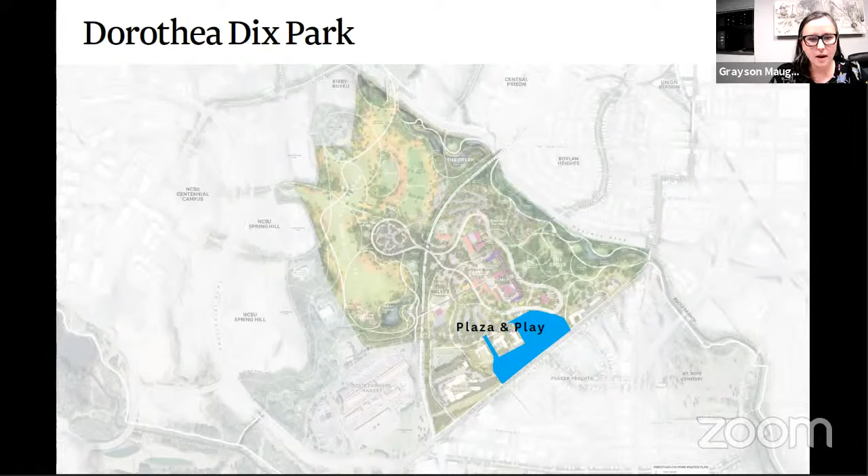You can also see on this image where the Plaza and Play lies within Dix Park and along Lake Wheeler Road, and how close it will be to the neighboring Fuller Heights neighborhood, providing future connections into downtown, to the farmers market, and to I-40.

This is a somewhat busy area of town. We have the Western Boulevard BRT project that the planning department is working on. We are working on connections to John Chavis Memorial Park with the Dix to Chavis project. The areas in pink within the park are phase 1 projects. Healing Transitions in green, which is right next to Plaza and Play, is also planning for some site expansion. And the State Farmers Market has recently adopted a master plan in the last few years.

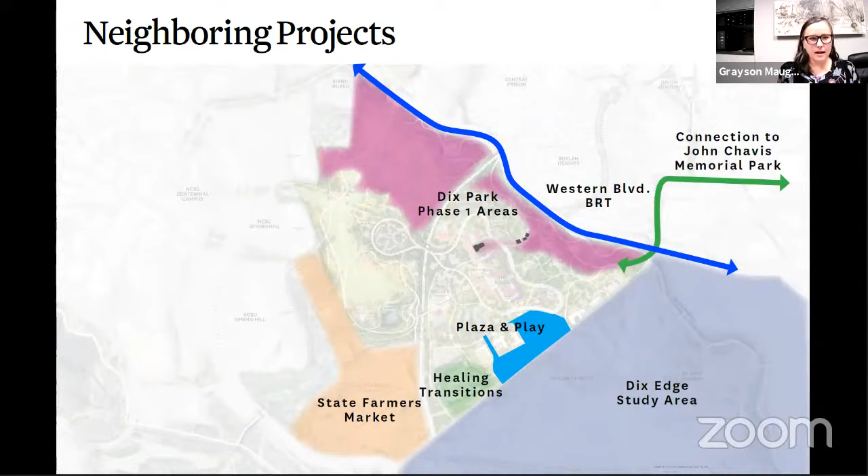And then in purple, I will mention the Dix Edge study area. This project is being run by the City of Raleigh's planning department. You can see how the project area is adjacent to Dix Park, but in particular the Plaza and Play area. During the development of the master plan for Dorothea Dix Park, City Council realized that the park project was going to have some impacts on the neighboring area, and allocated money to conduct the study area project. It is currently underway.

If you are interested in following this project, which will be creating a small area plan and looking at things like streetscape for the area, please go to the project webpage, which is raleighnc.gov/dix-edge. They are in what they are calling their visioning sessions, which are a series of meetings coming up in February. We heard your concerns. Now let's find some solutions. So I encourage you to participate in those meetings as well.

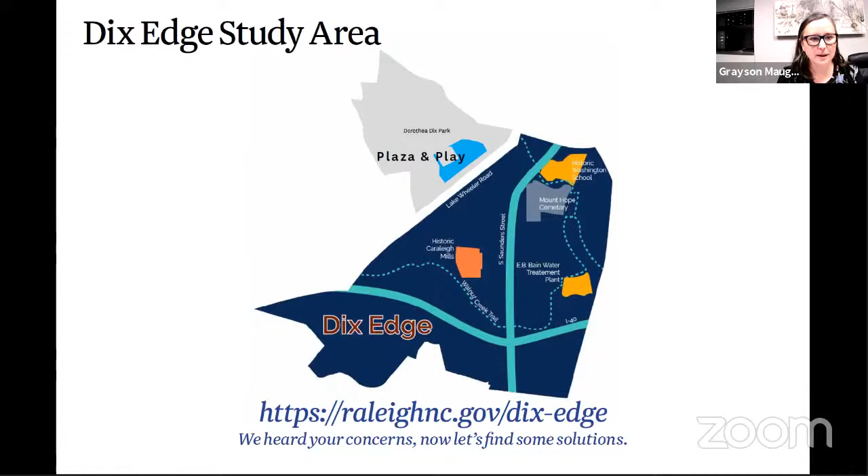Our project site is also the site of the temporary dog park in Dix Park. We know this is a very well-loved space by those that use the dog park, and the park staff has been working on finding another location for a dog park in Dix Park. We've heard the things you love about the park and are working to create another space within the park before the Plaza and Play site goes under construction, so there is another site for dogs in Dix Park.

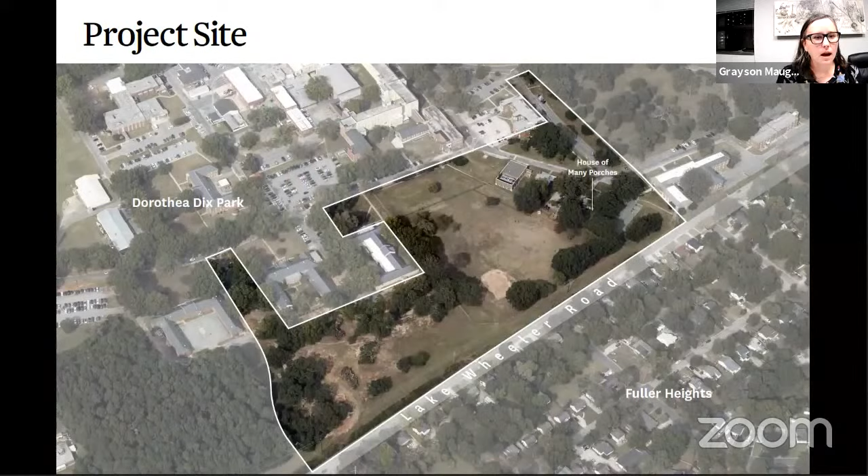You can see here the project area and how it runs right along Lake Wheeler Road. A majority of the site used to be patient recreation space when the hospital was open, so you can see remnants of a baseball diamond, some tennis courts, and a walking track. I'll also point out the House of Many Porches, which the design team will give you an update on.

Now our design schedule. Here we are in Schematic Design, on the second public meeting as I mentioned. We had our first public meeting in October, and we'll have our third public meeting in the spring while we're in design development phase. Following that will be construction documentation. The entire portion of this part of the project will take us to spring, summer of 2022.

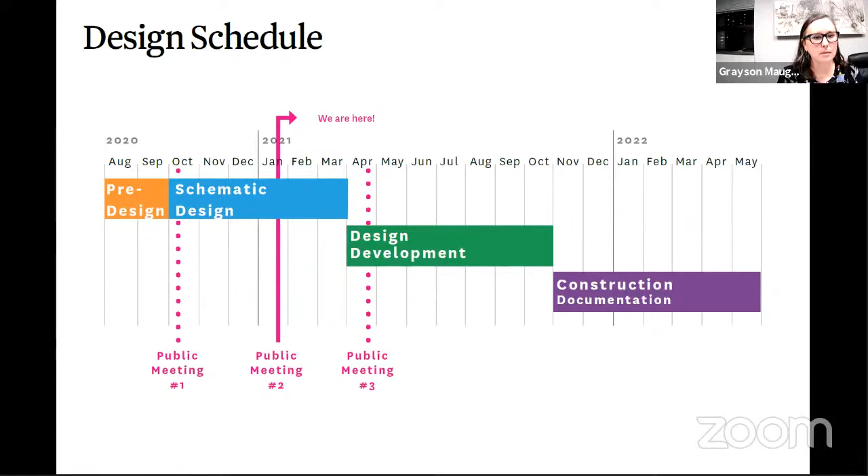With that, I'm going to turn it over to Jay Kumar, our Vice Chair of the Community Committee, and Shauna Overdorf, our Chair of the Community Committee, to talk about why this process matters. So thank you, Jay and Shauna.

Thanks so much, Grayson. And yeah, Shauna, please jump in at any point, but we're just really excited to talk to you all right now. And why does this matter? I was spending some time today trying to get my thoughts together.

As we turn over a new year, I was reminded of one of my favorite poems. It's called The Mower by Philip Larkin. I'm not going to read it to you, though it's great, you should look it up. But in it, there's a line that says, we should be careful of each other, we should be kind while there's still time.

During this pandemic, and as we are in this public meeting in a new and virtual way, it's important that the role of public engagement isn't lost. And that's why it's so important - this project will outlive many of us. It'll be a symbol of Raleigh and our vision, and so it's important that we get the input so that our vision for what we want as this city and what we want as this park is realized for forever and forevermore.

So what is the role of public engagement? We've done it in a variety of ways - through events, through meetings, through talking to each of you. There are three core questions that come to mind: one, how does this park fit into our vision of Raleigh? Two, how do we make sure that vision resonates? And three, how do we ensure that the concerns, the opportunities, the beliefs of the public are heard so we can rally around that shared vision to really accelerate and advance this park and make it as great as it can be?

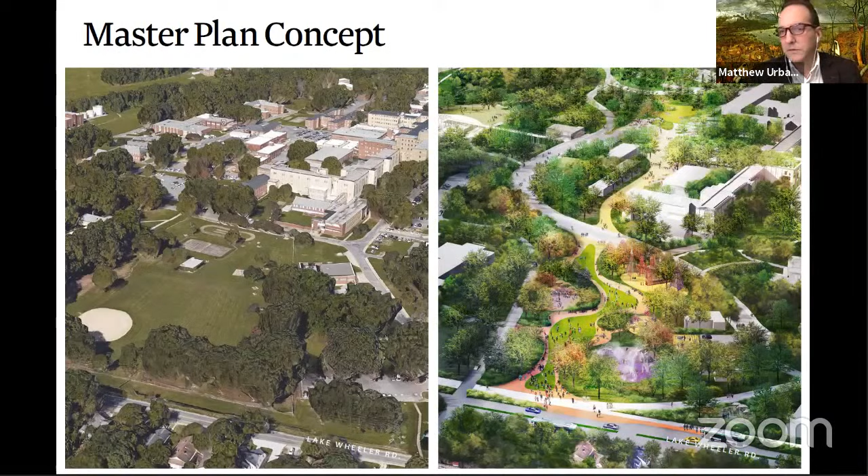The master plan concept for this area was that it would be a front door and an invitation into one of the main entrances into the space, and that it would contain plaza elements and play elements. That's the master plan concept drawing there, overlaid on the aerial.

So into the design—starting from building from what is here, we're looking at our beautiful site, many parts of which are already like a park with beautiful trees, topography, slopes, hills, and views. We want to incorporate that, and I hope you'll be surprised and excited about how we're going to do that.

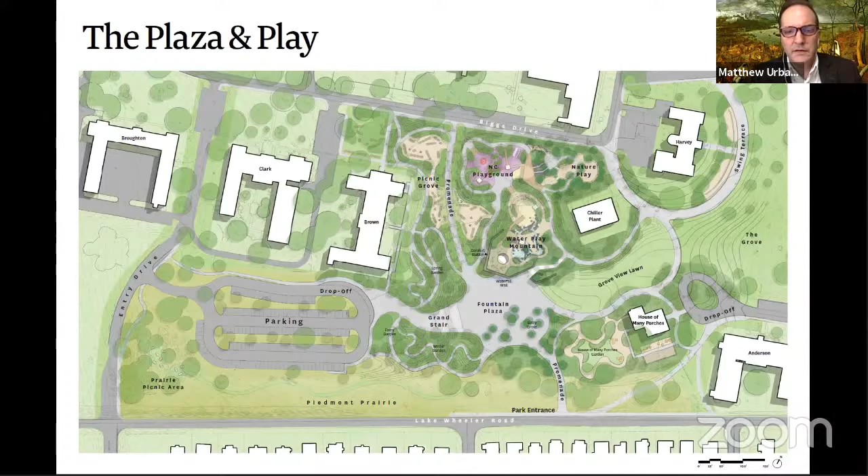So here's our plan—now don't worry, you don't have to memorize it. I'm going to come back to it many times to show you the different parts. It's got many parts to it, so we've broken it down into four major landscape types, if you will.

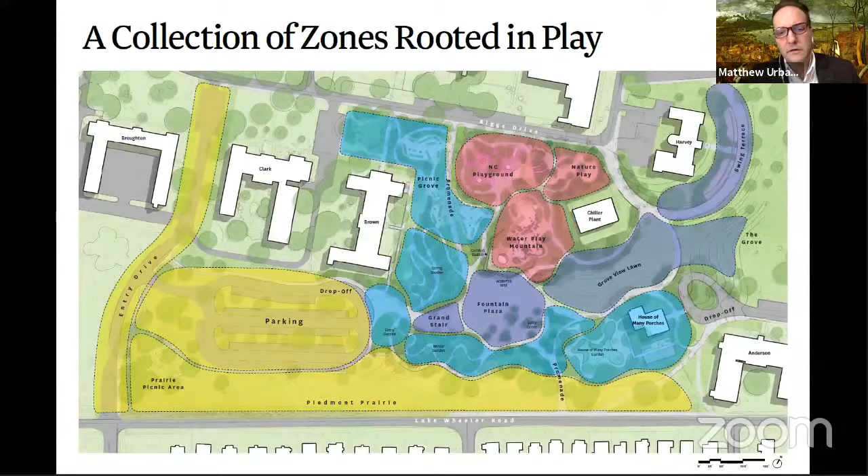The yellow, which we'll do first, is the entry landscape. That includes the parking area along the road, and the public invitation along Lake Wheeler. Next is the civic gathering spaces that make up this purpley blue space that goes through the middle of the scheme. Then we have the play areas, more directly associated with play, shown in pinkish areas. And then what we're calling a collection of gardens, in turquoise blue. We'll get to that as well.

So here's a big idea. One of the things we knew was this beautiful grove of trees, which has played such an important historic role—it's really the important historic designed landscape of the hospital. How could that be connected and incorporated into the site? Here's that beautiful Harvey Hill, and events have been out there. It's got great views back to downtown.

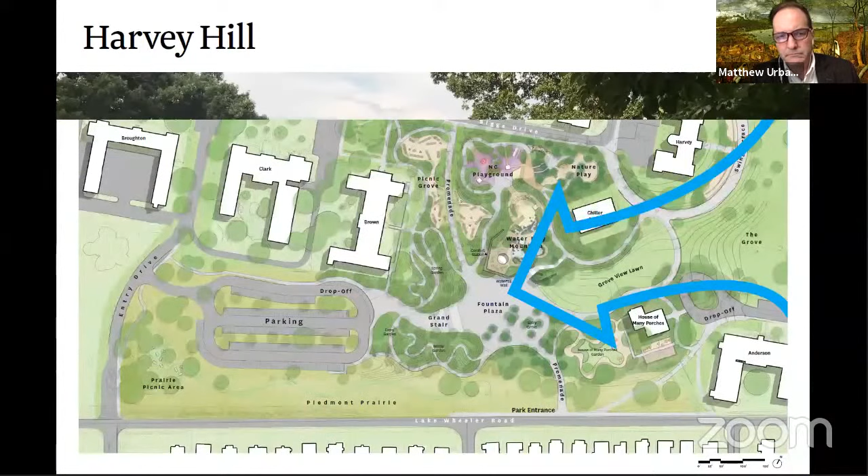So our idea was to actually expand the site to connect to Harvey Hill, take away some impediments, and basically draw that whole part in, making it part of phase one—making the first project much bigger than the 12.5 acres it originally was going to be.

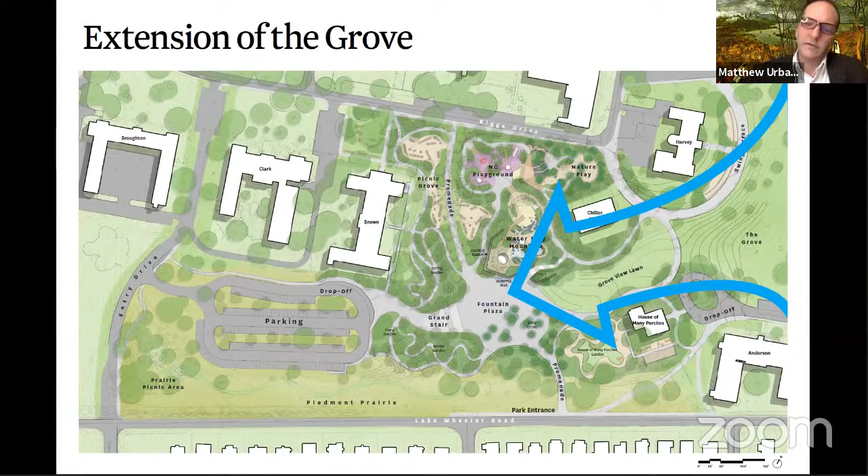So here's a way of starting to understand how that works. We're looking at Picot Drive, looking south on it. Go to the next slide, please. You can see highlighted here: Anderson, which is the old nurses' dorm, is to the left. The House of Many Porches is in the middle. Picot Drive is right in front of us.

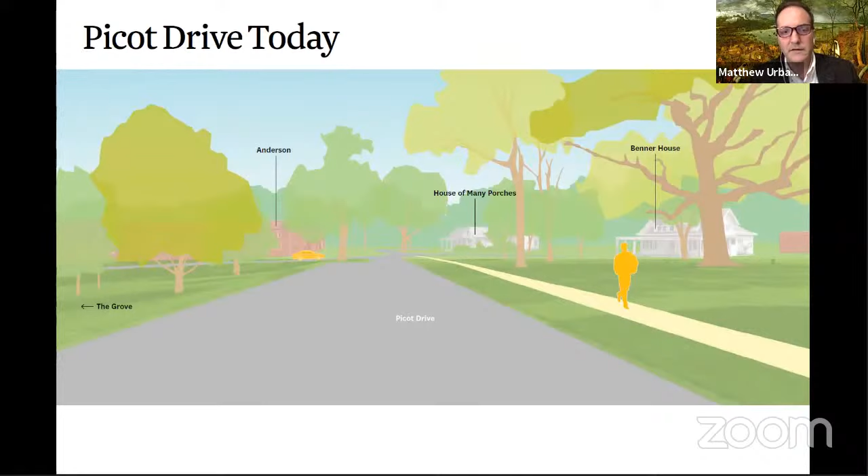So if this is what's there now, with Picot Drive separating our site—which is on the right, with the Grove on the left—our big idea is to remove the drive, make a path connection through here that will actually become part of the loop promenade of the park eventually, and make a stronger visual connection to the House of Many Porches, merging these two landscapes together. It's like taking advantage of what we have in a great way, building from what is there.

So another principle, of course, was opening up and connecting. The park site was actually a hospital and was not open to the public that much. So here it is along Lake Wheeler Road. We're going to change this whole dynamic here.

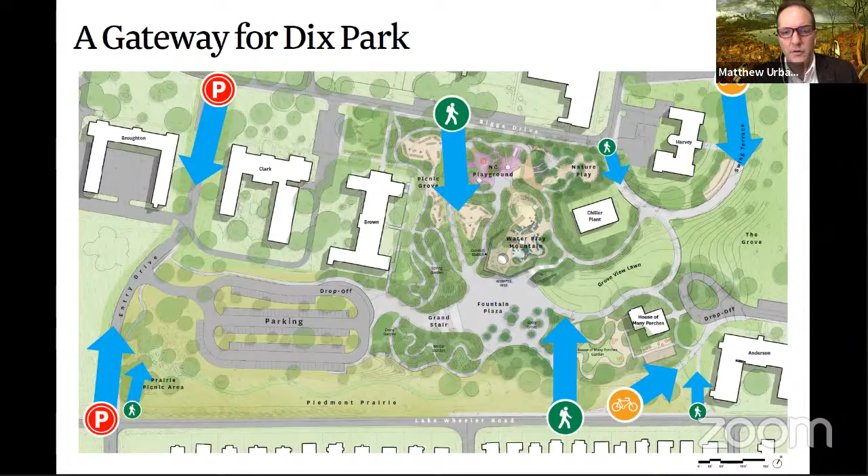So we're looking at lots of different modes, different ways that people get to the park. We got a lot of feedback in the public process about this. We have vehicular, pedestrian, bicycle, and people coming on transit—lots of different ways to come in, because you really don't want just one entrance into a space. Driving was what people said they would mostly use to get here, but biking and walking were also important.

And also there are people that will come from the bus, and we're looking at planning and expanding, making a new bus stop right in front of the site.

So looking at vehicular first, we have several moments where we're making a new entry drive into a parking lot on the west side here, and then other moments where you can get dropped off along Lake Wheeler, come in by the House of Many Porches and Anderson, and also drive in through the hospital site itself.

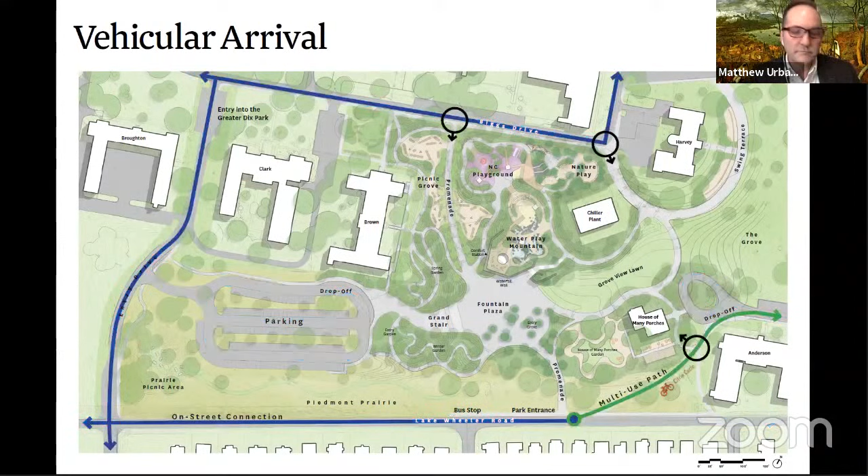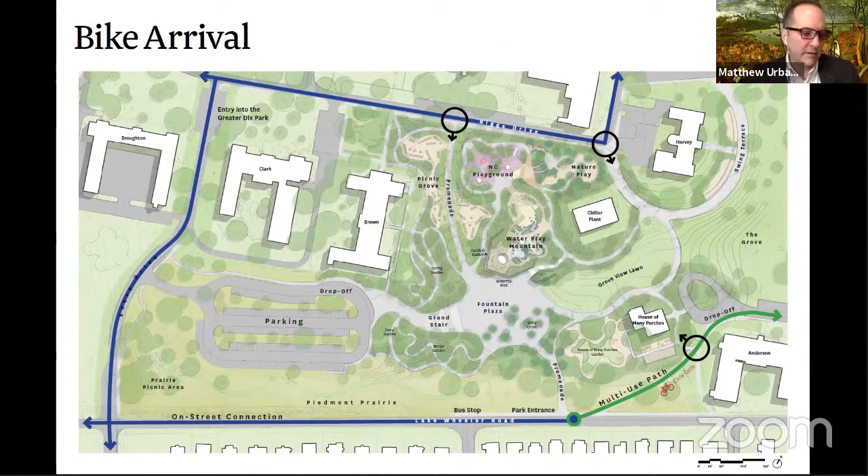Bike arrival is through various moments along here. We're going to be extending a multi-use path that will connect the Rocky Branch Trail with the Walnut Creek Trail eventually, and you can see that coming in green. So bike arrival is really going to be a great thing to have here, and we'll have bike parking and other facilities.

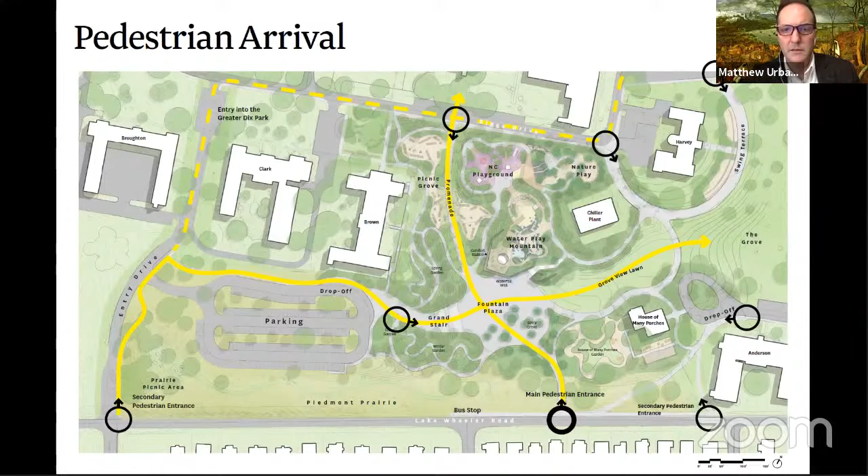Pedestrian arrival—we're going to actually walk up on some of these yellow paths here in a minute, and I'll give you a sense of how it feels to walk along them. But these are key moments for pedestrian arrival. We've made several along Lake Wheeler.

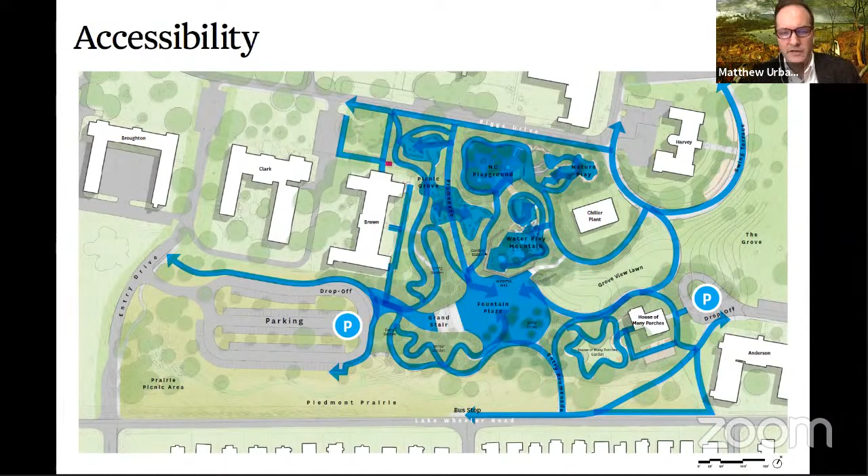And then just to give you a sense of how very seriously we took the accessibility challenge, this blue highlights all the completely accessible pathways and areas that aren't green spaces that are incorporated in the plan. So it is really saturated with accessibility all throughout.

So now we're going to look at the entry landscape, what was highlighted in yellow, and some of the things we heard that we were able to incorporate into this area. There were a lot of comments about parking, how it was important to have it, but how it shouldn't overly drive the design. Opportunities for North Carolina wildflowers would be great, and this could be a sunny open area for that kind of thing.

Bringing people together was another theme. There were a lot of plant advocates in our outreach groups, and bringing people together around plants. Finding places for food festivals, which could happen in the parking lot area, right next to the park, and making a selection that is beautiful and diverse. People want us to think about pollinators and birds too, and we have all those opportunities here.

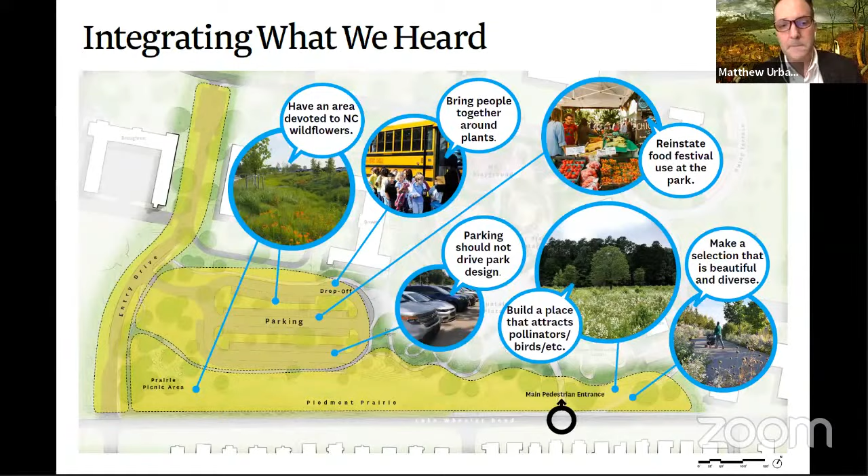One of the things about the hospital grounds site is it's a little simplified right now, very much just big trees, which are beautiful, and a lot of mown grass. So a lot of our idea is to bring natural complexity into the site.

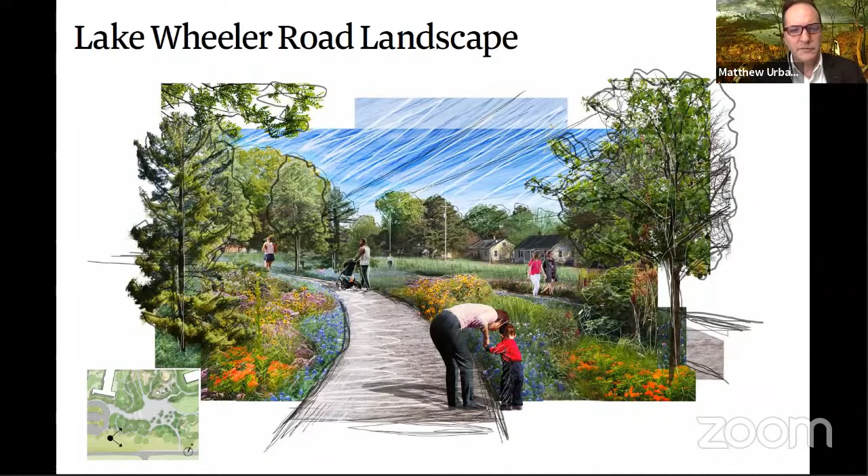I'm going to show you a series of sketchy kind of drawings that give you a sense of the ambiance, the feel, and some of the texture and ideas as we're working them through. These have a feeling of being taken right off the drawing board in the idea sessions—fresh and put together to give you the best impression we can at this point in schematic design.

Next we're going to look at the civic landscapes, that purple series of spaces that move through the middle. This is a place where we could really start to address the charge of offering something for everyone, because there's a series of spaces that can happen here.

When we talked about these elements and asked about them in the last public meeting, people discussed iconic elements, deep sight lines, grand entry, civic fountain. People voted on how important each of these things were, and we really feel we've been able to incorporate them into the design in a totally unique way.

Looking in a little more detail, one thing we heard a lot was to have play for all ages and abilities. I'll show you a spot where we've incorporated a swing terrace overlooking the Grove, on the right side there.

We want to invite people to have their own experiences as well as be in groups together with their fellow citizens. Put a heart in the park—the Fountain Plaza is really meant to be that.

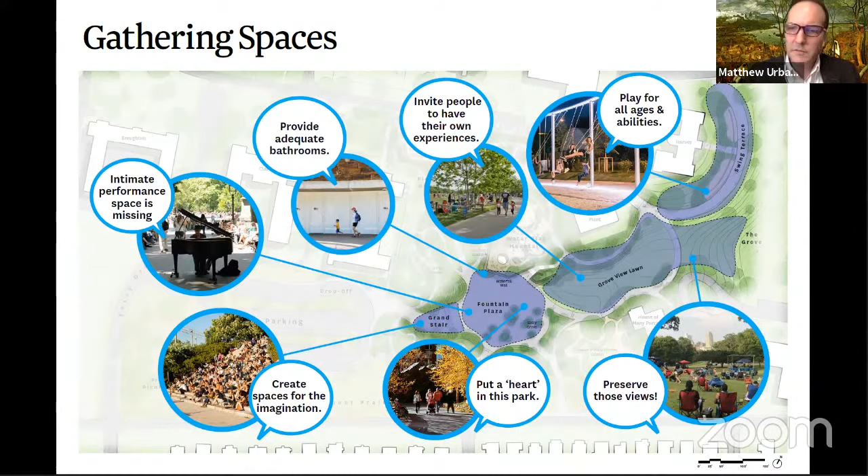Preserve those views, and in fact we've been able to even enhance those views in the scheme. Create spaces for imagination, intimate performance spaces, and the always so popular adequate bathrooms. All of these things we've been able to do, and they appear along this path.

Now here's a vision of coming to the top of a terrace as we're moving. If you look at the little plan down here, we've come from the parking and started walking east, getting to the top of a grand stair. There are lateral paths that also take you down, but the grand stair can work as a place to sit also, and it overlooks this distant view. I'll point out a few things here.

You can see the view to downtown because we're at an elevated point, looking across the existing Grove landscape and the new pieces we've made there. To the left is this intriguing element, a civic fountain, inspired by some of the natural landscapes of North Carolina we've seen, using native North Carolina stone. It's got a waterfall effect with splashing water coming out of the pavement—a really nice place to cool off.

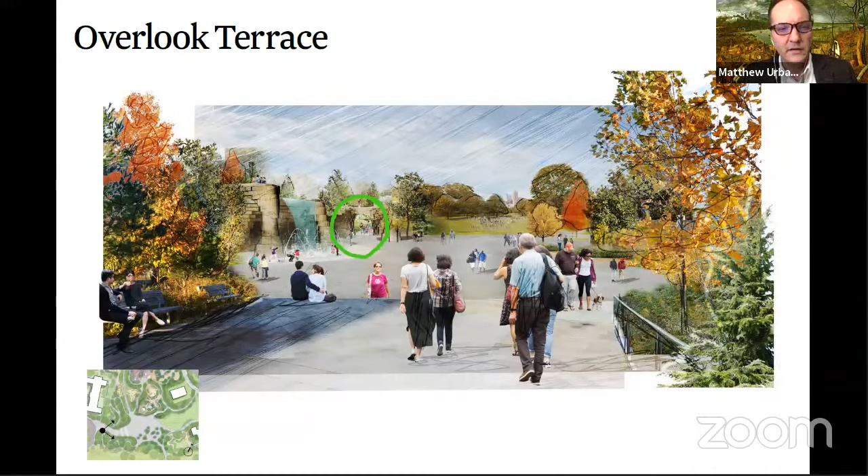Now, if you went down the grand stair and turned around and looked, you could see people sitting there, looking at the view, seeing people moving around in the plaza, or maybe watching somebody playing the piano or doing a small performance.

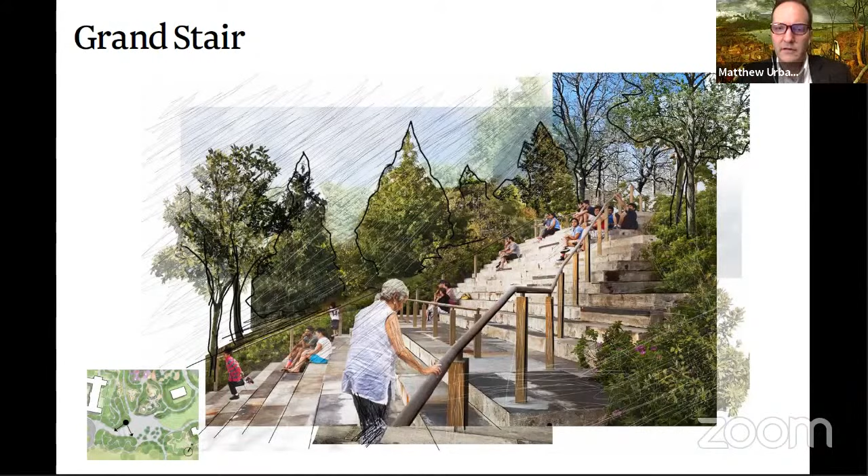This could be a great place for puppet shows and other small scale things. It could have theatrical performances here as well. And it's embraced on both sides with beautiful greenery, which could add seasonal variation and bring in the native landscape on both sides.

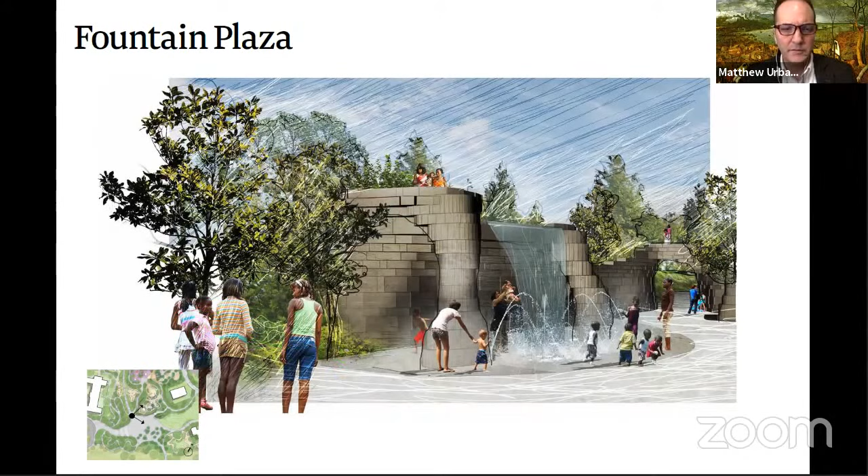If we keep moving forward along that axis, across the plaza, we'd get to the performance lawn area, the extension of the grove. We could see people lying out, having picnics. There might be a bigger performance here in the evening. This might be a great place for flying kites and other kinds of festivals and things like that.

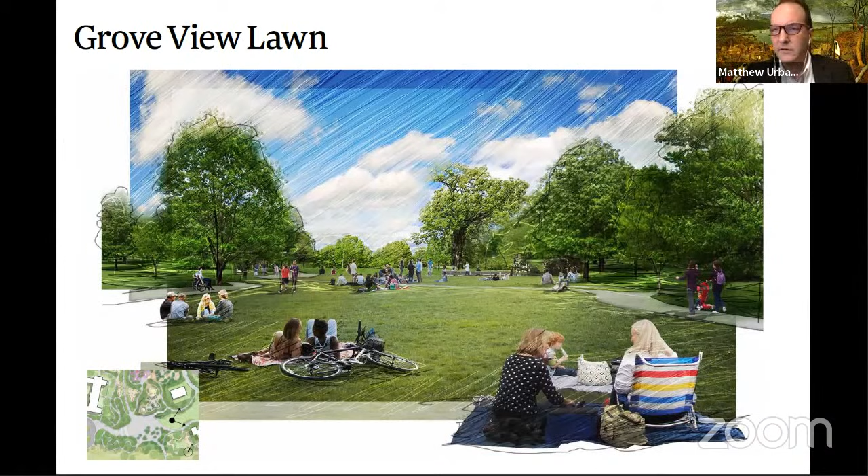So the plaza becomes this heart that is then connected to the very important green space that you already have there on the Dix Park site.

And then if you moved further along and now look at the little plan here, you can see right next to Harvey we have this idea of a big civic swing terrace, incorporating play for people of all ages. Swings are really great for that.

We're looking at all different types with different kinds of accessibility for everyone, for adults, for children, even swings that people can go on together, big basket swings and things like that. We'll show you more detail on that as we develop it. But the swing terrace is a way of bringing play out and connecting it to the grove.

So what were some of the things we talked about regarding play in the public meeting last time? Some of the things that came up and got high votes: nature play got high votes, imaginative play, playful objects, and water play. People let us know what they thought about each of those.

Another important theme that we've pursued and that came up in public meetings is making sure play is for all ages and all abilities, really making the space inclusive to people with different levels of challenge and different ages. So it's not just for little kids and less exciting that way. Although little kids are good too, we like them as well.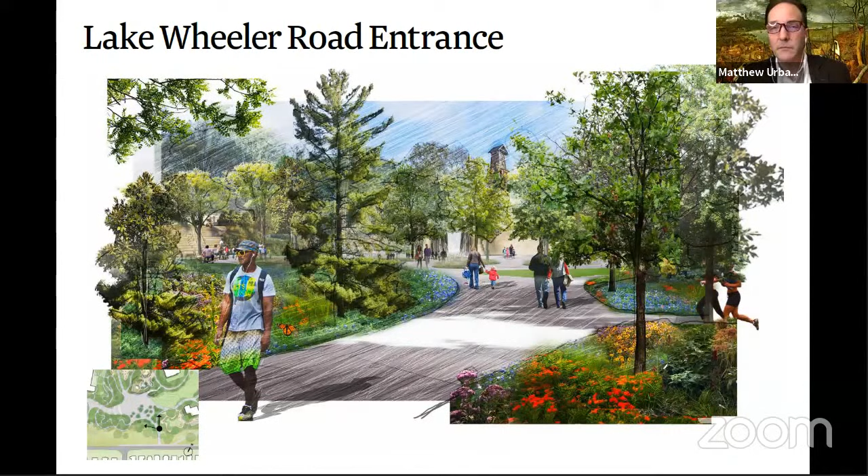And you just have come through this more open North Carolina prairie garden kind of effect, with butterflies and more brightly colored flowers.

As you walked up, you'd come to the fountain, and one of the neat things about the fountain is we want to make a waterfall that you could actually walk behind. That's sort of what we're starting to depict in this conceptual drawing here.

So the water would be coming down off of this kind of mysterious, cliffy thing, and pouring down. We're working with great fountain designers to help make this work and be really refreshing and a lot of fun to play with, or just to look at and watch kids play in, which is always just about as much fun as doing it yourself.

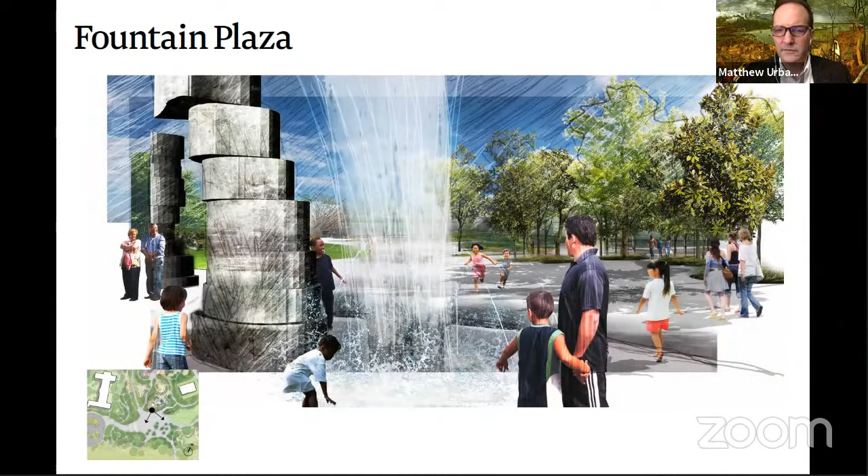Then, as you can see in the key plan, we've now entered the playground. We've walked around the wall and entered the playground, and we see that there are several features there, including a kind of bowl-like feature which would have some towers connected by aerial bridges.

We could make many of these connections handicap accessible, so you could even take a wheelchair through some of them. We'd have climbers, we'd have slides coming down slopes, but also it's not your typical playground.

It's not your typical playground because of the elements and materials, but it's also really embedded in a beautiful lush green landscape that would be changing with the seasons, giving us different things to look at all throughout the year. It's sort of a hallmark of a lot of our play spaces that it really incorporates the landscape and the experience of nature into the play.

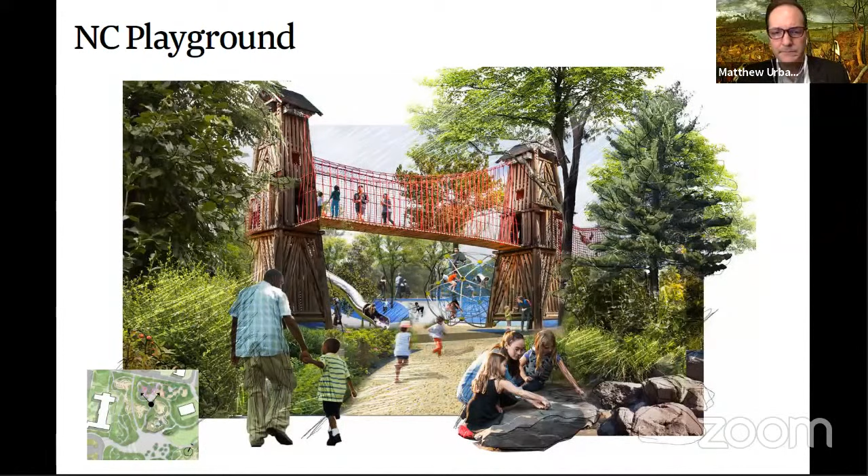Another place in the playground, highlighted in that detailed plan here, is something we're calling the sand bowl. Right now it's at the bottom of a water play area that would go down behind the wall or down a hill, and it would be a great hangout spot for little kids.

It would also have seating built in for parents to sit in the shade and watch the kids play. We'll have shade structures incorporated in here as well.

It'd be wonderful to have little imaginative play elements like little houses and other things, as well as platforms for sitting on and water elements, so kids can really get messy in the sand, mixing and making their sand pies and all of that kind of thing.

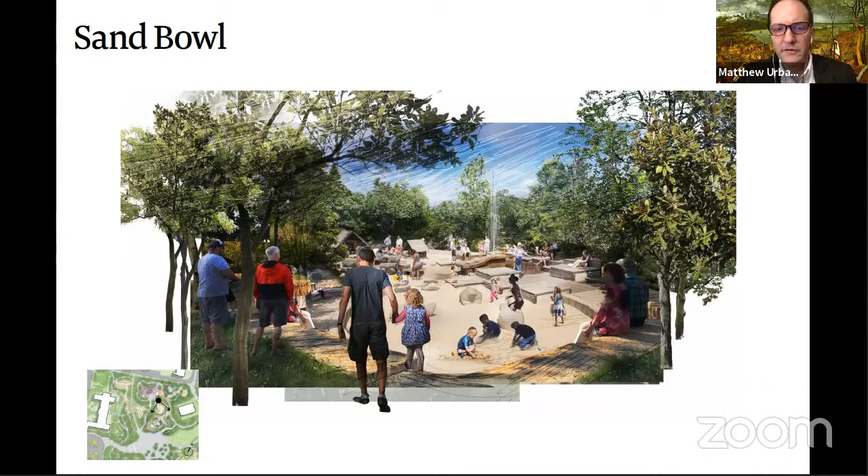So that was right here in the plan. The waterfall is here in the plan, and this whole area through here would be a water play area that would go down through the landscape, connecting those two together.

And then this is that area that had the two towers in it, kind of like a play bowl. So this is just highlighting some of those elements.

We have slides built into a hill. This is an idea of a deck that parents could hang out on, and it's a connection — the slides would actually go from a high point here and connect underneath this space, giving an exciting over-and-under kind of quality.

Climbing structures for building upper body strength and giving kids challenges, slides built into hills. And the water play area could have little places where water is shunted down small streams, as was suggested in the public meeting, with little dams that control it and ways of redirecting it.

Then we have a big idea inspired by some of the rural landscapes we saw, directed to by people who gave suggestions in the public meeting. We want to make a little play mill, like with a water wheel, where kids could redirect water through chutes to make the water wheel go around—kind of learning without being aware that they're learning. It's a kind of water lab built into a natural setting, with a sandbox at the bottom.

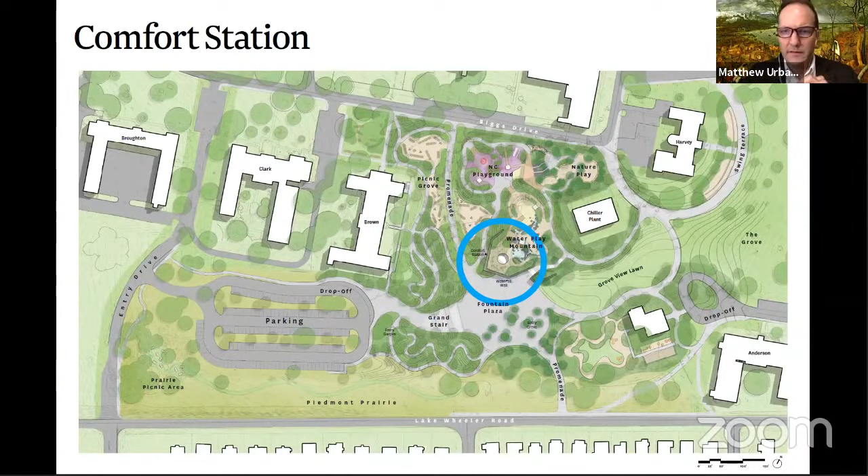Now, we were able to incorporate a comfort station right in the middle of the scheme, and we've done that with Hobgood Architects, fantastic architects from Raleigh, by literally incorporating it into the landscape. I'll try to explain that using some of their concept drawings. This is actually from a Renaissance painting, but the idea is a kind of oculus, an opening to the sky, which would be over the public space of a series of cabanas.

If you look at this on the right, you see these rooms arrayed around—think of each as a little changing room or a cabana. It has a bathroom, a sink, a changing table, and enough room for a couple of people to go in, like if mom wanted to change kids' bathing suits with them, and obviously enough room to turn wheelchairs around.

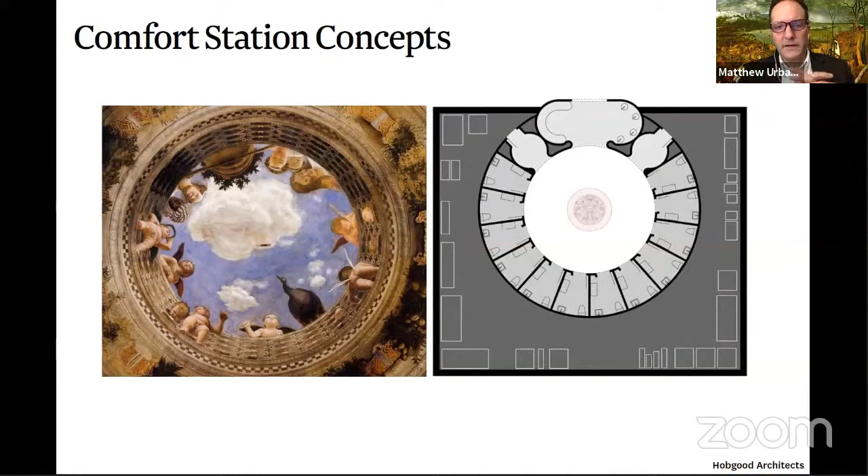So there's a series of cabanas arrayed around a public space, and all of that is built into the landscape. Here's a view the Hobgoods did of that idea—imagine those doors lead into the individual cabanas, and then there's this common space in the middle, open to the sky, and actually open to the playground above.

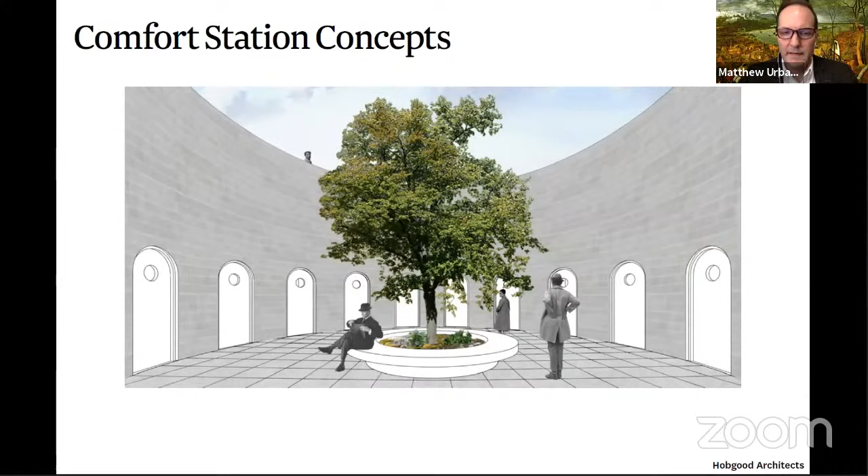There's a kind of parapet wall, so people could look down and see people going in and out below. It's very open to the air, not stuffy, and lets sun in—it would have a great dynamic relationship with the sun as it moves across the space.

So this is part of their study model, working on the structure of it. This is what would be underground—this part here is open to the sky with the tree in the middle, like I just showed you, and these are the cabanas, the roof of which isn't shown. Those would be covered with landscape, so you wouldn't see them—you'd only see the open circle part.

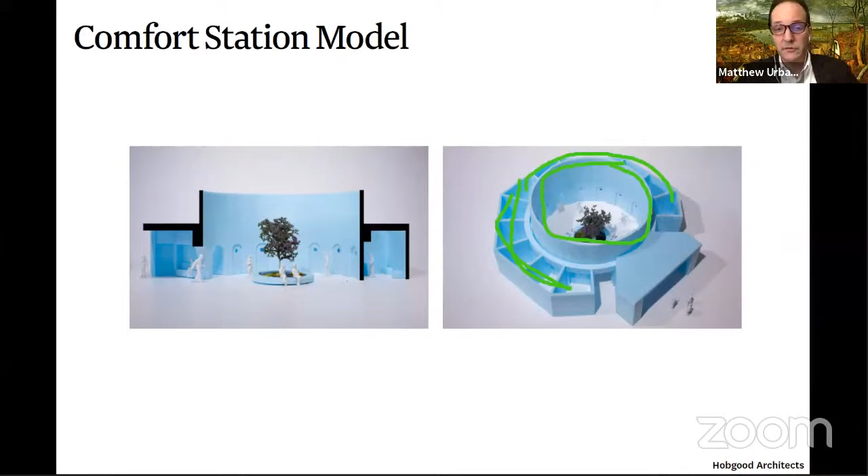So they're still working on that. That's a fantastic idea, though—very great for schematic design to have that.

Then the gardens, the last part. This is really a great opportunity to have all kinds of things for different people. There are all different types of gardens incorporated.

Some of the comments: I look forward to a place for gardens, add places to sit and to wander, incorporate concessions—we're looking at the House of Many Porches for that—and integrate site history into the park. We have an idea for how to do that in the garden around the House of Many Porches experience.

It is more than just a playground, and you can see we can definitely do that with this design. Go big on picnic areas and shade—we have a whole series of picnic gardens, or it's labeled a picnic grove here—and reach as many people as possible with food. There's a lot of interest in food in Raleigh, and having great places to eat together in a park is an important thing.

In the detailed plan, you see this main path or promenade, as we call it, going up, connecting the plaza, and eventually going right up to the middle of the park someday. The idea is it would be planted with tall tulip poplar trees or some other beautiful tall tree, and also incorporate southern magnolias, for instance.

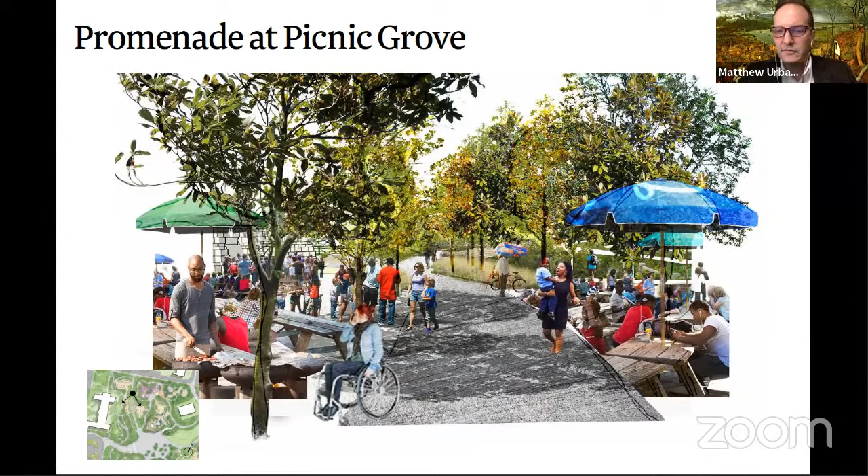Here's that detailed plan of the promenade we were just looking at—this path, with rows of trees on either side, then picnic tables laterally on each side, shaded pathways, adequate seating both along the promenade and in the picnic areas, and grills, indicated with these little trifoliate shapes, which would bring people together. Cooking together in public is a great way to get to know people and have fun together.

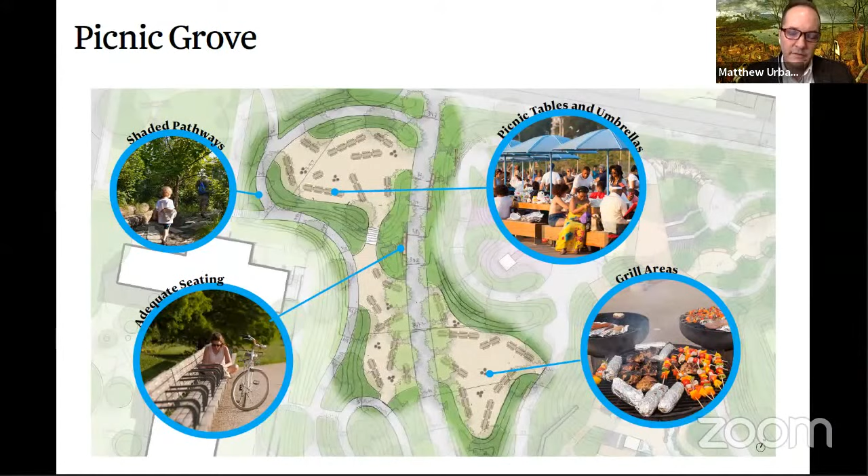Now back over to the House of Many Porches. We've been working with excellent Joseph Oppermann architects—Joe restored the state capitol, for instance, with his team of historic preservation architects—and they've shown us how the House of Many Porches actually had more porches, some of which were lost over time, and they've been looking at ways to restore them and bring back the proper finish and detailing.

So we just walked around the house here. They've done very careful archiving of everything, recreation and interviews with people that lived in the houses, so it's been very thorough and responsible in terms of the history. Bringing this in, it's a beautiful little house—looks like it's in a children's fairy tale with this beautiful slate roof. It's going to be a great addition.

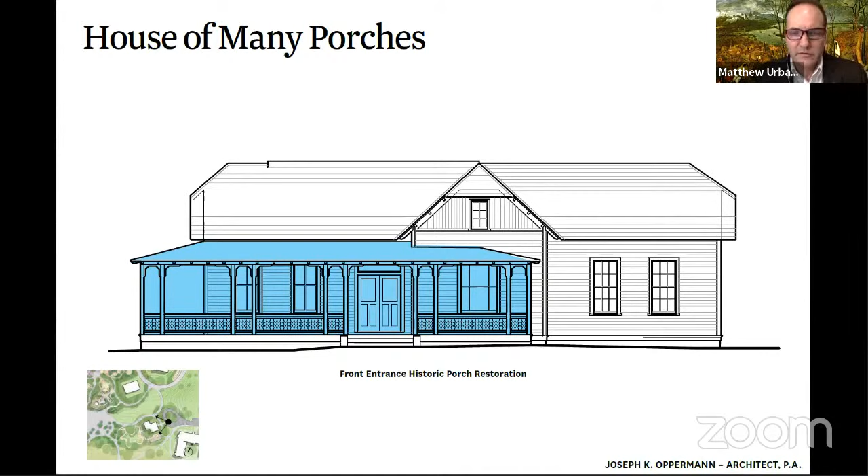Outside that, we see opportunity for gardens that feel nice next to the house, with almost a residential scale to them. We've been looking at ways of incorporating history by bringing physical markers into the park and the garden that you would go around to kind of learn something.

And doing it through a series of markers. This is something that we'll continue to detail and do outreach in terms of what stories we want to be able to incorporate into this section.

Another idea that can be part of this garden, but would be infused throughout, is incorporating art. We have art ideas in the works, one of which is tapping into the local woodworking and wood crafting tradition of North Carolina.

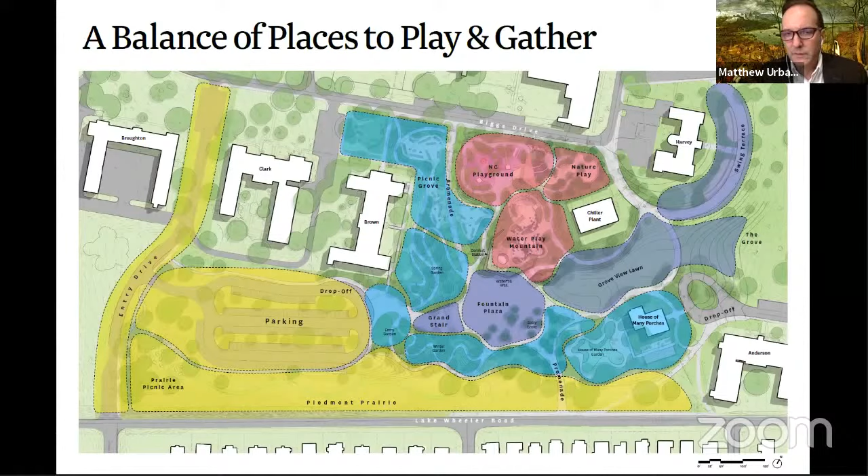The idea really, which was captured in the Plaza and Play name, was balancing places for playing and for gathering, and trying to incorporate something for everyone. We hope you agree that we're really going in the right direction with the schematic design.

One other thing is we have thought carefully, being the master plan stewards, about how this would become part of the master plan eventually. Some of you may remember this idea of a big promenade that connects the whole top of the hill someday, and that would be incorporated right here in the plan.

And then there's all kinds of other neat things to think about connecting. Could this building become part of a park supporting building someday? There are opportunities for expanding our gardens in this direction.

The master plan called out a big parking area right off of the plan up in that area, so expanding parking in that direction. All of these things are carefully worked out so they will dovetail in with these future possibilities here.

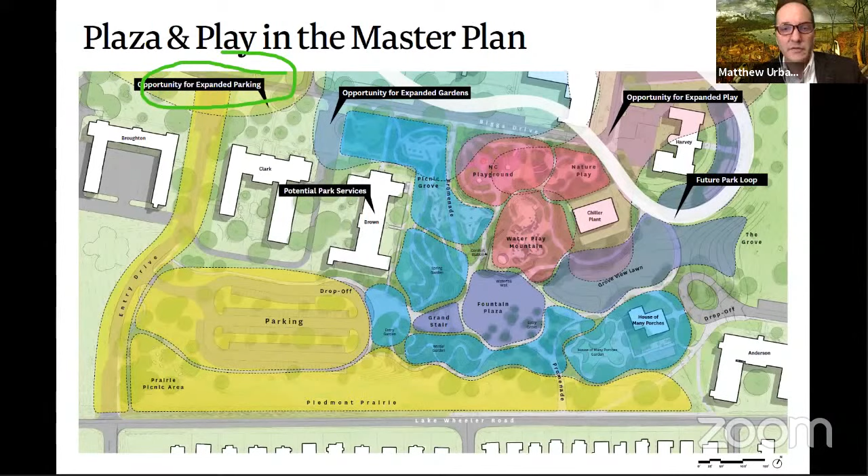And with that, I've gotten to the end of the schematic design presentation.